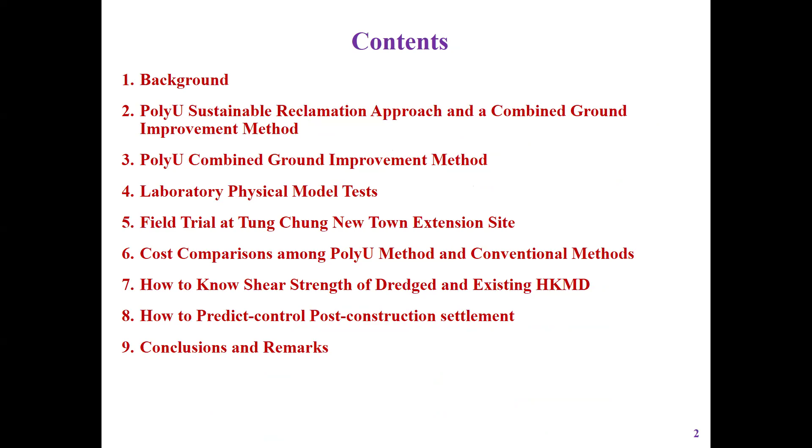Okay, you can see the contents of my talk. I don't want to spend time on this.

You can imagine the short supply of land for construction, and you can see the demand for housing in Hong Kong. To solve the problem, one solution is to create a new piece of land for buildings and infrastructure. You can see here, my mouse is here.

This is Hong Kong airport. Professor Larson mentioned this is a new airport. Actually, the old airport was in the downtown area. This is Hong Kong International Airport, finished in 1997-98, with construction started in 93 or 94.

The government proposed to create land here. The total area is about 1,700 hectares for up to 1.45 million people. This original proposal was scaled down by the government, reclaiming only this area first, as phase one. The total area of reclamation is 1,000 hectares, which is 10 square kilometers, for nearly 500,000 people. The feasibility of this project has been finished.

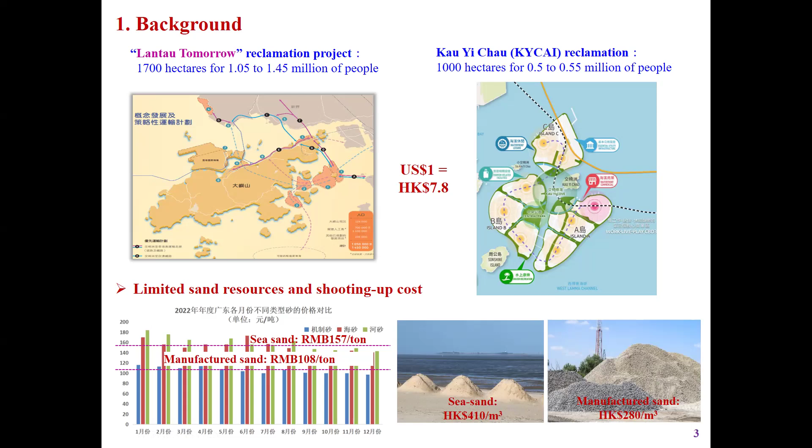So we propose a new approach. This is a very practical approach. Say we call the PolyU, or the Hong Kong Polytechnic University, we simplify as PolyU. In the last 5 years, I got quite big projects.

So we propose a sustainable reclamation approach and also a combined ground improvement method. The first one, you want to know what's the meaning of sustainable reclamation approach. Actually, we don't use sea sand, we don't use manufactured sand.

We use local dredged Hong Kong marine deposit, or Hong Kong marine deposit waste. Because in construction of seawalls or excavation works, people will also dredge some Hong Kong marine deposit, which is also dumped in some areas. We can utilize this kind of Hong Kong marine deposit waste. Or we can also dredge new Hong Kong marine deposit in Hong Kong waters, or waters nearby, or even in channels, navigation channels. And those materials are free.

And we don't have to ship the material from a far distance, so you can save the fuel cost. For example, we can also use various other wastes, like construction waste, other waste which can be utilized, so that we can reduce cement use. We don't use sea sand or manufactured sand. Overall, together, we call this the sustainable approach for reclamation in Hong Kong.

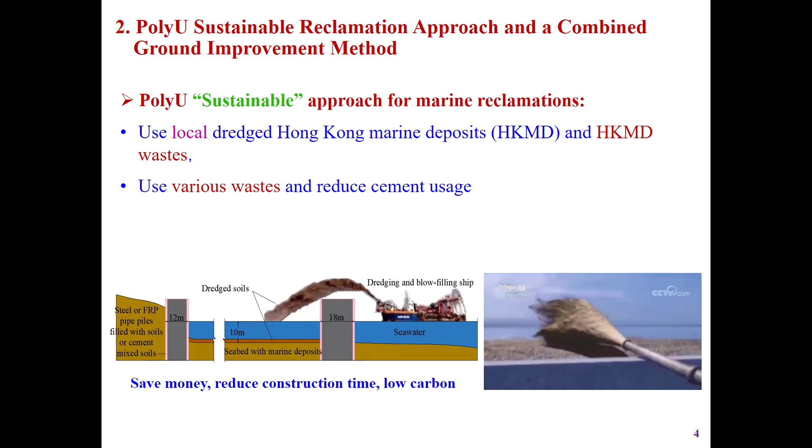And the idea is to construct the seawall first. We need a seawall because the proposed reclamation area is in the sea, so we have to build the seawall to surround the area, and we have existing marine deposit. The seawater depth is about 8 to 10 meters, and we have marine soils in the seabed. The thickness can be a few meters to 20 meters, even more, depending on location. So the soils in the seabed are also soft—it's a mixture of clay, silt, sand, and some shells.

So we build the seawall first. We keep the original marine soils in place. We use a dredging boat to dredge materials, use a hydraulic pump, then pump the marine soils, the marine deposit, as a fluid, then pump it into the area, above the seabed, to fill this area to sea level. Normally in Hong Kong, the land level should be 6 meters above sea level. Then we do this.

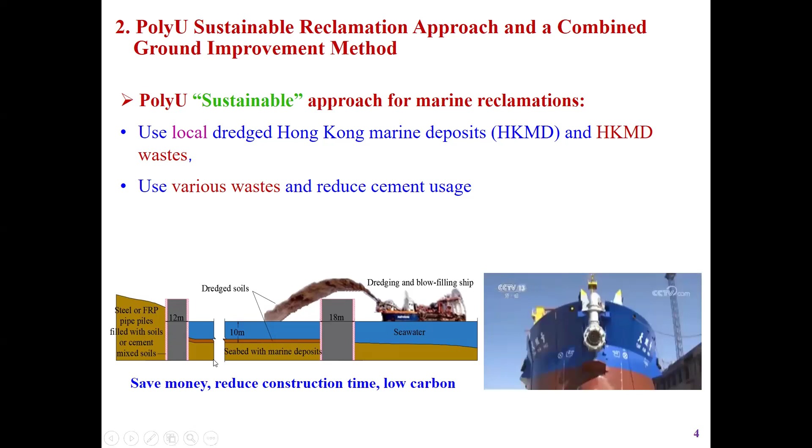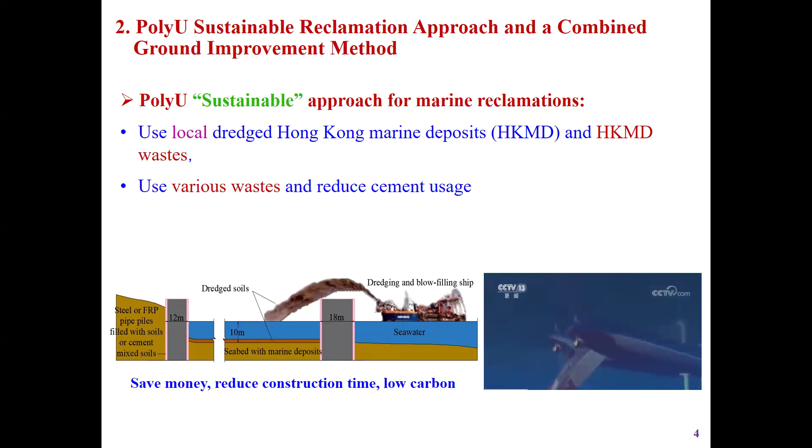The problem is, the soil in the seabed is soft. Then when you pump additional soft soils on top, it becomes even more soft—not good for construction. So we have to improve it. And how to improve it in a time-saving, cost-saving manner is a challenge. So we proposed a combined approach.

This is the second part. A combined ground improvement method is a combination of different techniques put together to improve the soil. So what's the basic idea? For this so-called combined ground improvement method, you can see this is the seawall, and this is the existing soil which also needs improvement. So the idea is we improve the soil here first.

Here, marine soil slurry is placed in by hydraulic pump, like a liquid. To improve this liquid-like soil, we place a horizontal drain first—on the seabed surface, in one layer. Then we pump in additional slurry above the seabed, and put a second layer of horizontal drain on top. This is the first drainage layer we place, then we pump in additional slurry above, and put another layer on top. These are the horizontal drains, in different layers.

Number one is this layering process. Number two is we can connect them together.

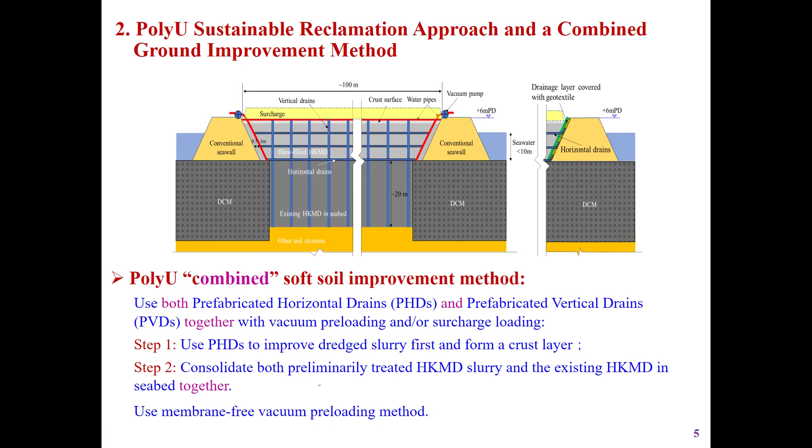We can connect all the horizontal drains to the pump vacuum pipes. Vacuum sucks the water out. Use a pump to suck the water out, and use a pipe to connect horizontal drains. Then use a vacuum pump to suck the water out.

So the slurry will settle down very quickly. Okay, this is the idea - it settles down. Of course, we can pump in and let it settle down. Then you pump in additional fill on the top, maybe up to the seawall level. You can see the soil here, this is sea level outside.

The soil here is above sea level, so the soil above can easily dry, because the slurry at that depth on the surface is above sea level, and because of the sun and heat, evaporation, the soils on the surface can get dry very easily. So we can form a crust layer with high shear strength.

Then we can go to the second stage of ground improvement. When this crust layer is strong enough, the machine can go to the top. Then you can install vertical drains from the top all the way to the bottom.

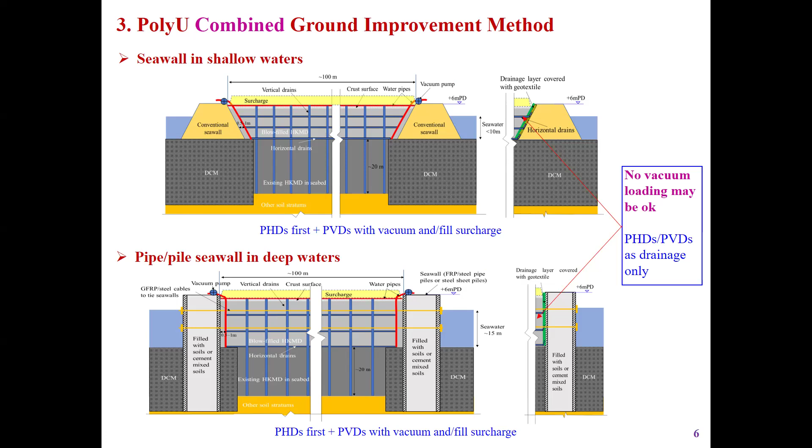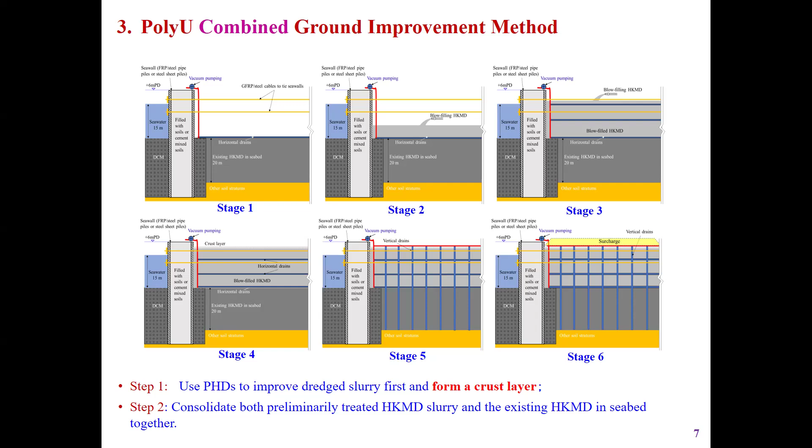Okay, two questions, I remember, okay. So these are the steps: one step is to place horizontal drains, pump in the slurry, and so on - no need to go into details. The important thing here is we use horizontal drains, we apply vacuum, and we don't have to seal the whole area.

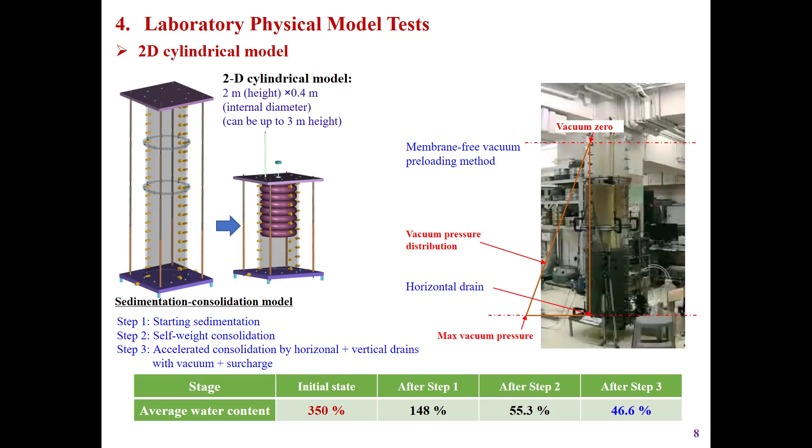So we don't have to seal the top, don't worry about the leakage of vacuum. That's some new ideas. And what does the horizontal drain look like?

We propose horizontal drains in a grid format. The spacing can depend on the design. Of course, this is another model test.

It's a 2-dimensional plane strain model, not 3-dimensional. And horizontal drains are in the grid format. Grid format is good, we don't need horizontal drains like a plate or sheet.

The horizontal drain is even better because later we have to install vertical drains. So in the grid's empty space, we can install vertical drains. This is just for preliminary improvement of slurry.

You can see, so we measure pore pressure, we measure earth pressure, everything. This is after improvement, and then this is settlement. We measure settlement at different levels, and the initial water content is 200%, which is liquid.

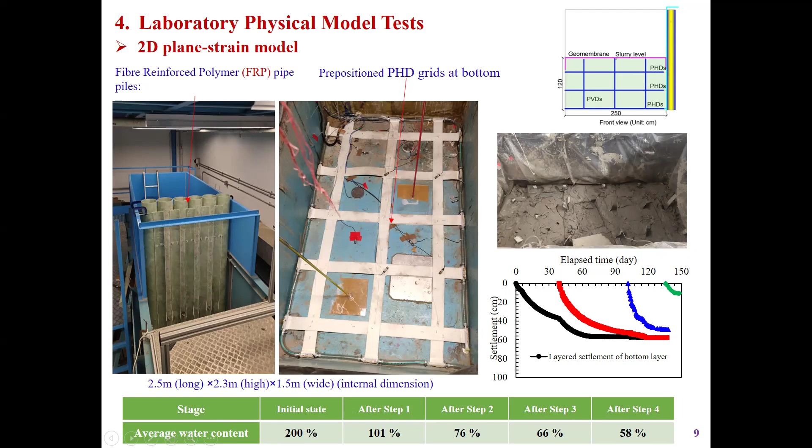After the improvement it's about 58%, like a semi-solid. You can see for the cylinder test, two-dimensional cylinder test, the shear strength initially is 0. It's slurry, so it's 0.

After improvement, the depth and thickness also reduced, sorry about that. The shear strength increases gradually with time to more than 40 kPa, which is quite strong enough. I will show you more later.

We can see a crust on the surface, enough for a machine. We can place a machine on top. This is for the two-dimensional cylinder test.

In the two-dimensional plane strain test, you can also see the initial shear strength is near 0. After improvement, it increases to more than 30 kPa. This is from 2 different types of physical model tests.

To show you this, actually from slurry, horizontal drain, vacuum preloading, we don't need to surcharge. We don't have to seal the top. So this is the idea.

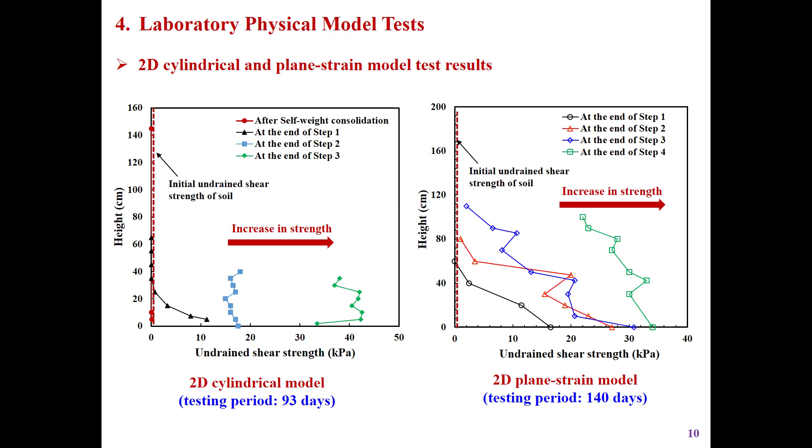Of course we need a prototype test. The physical model test size is small, so we need a large physical field trial in the field. So we got the government support.

This is from government or university. AECOM is an international consulting firm, Build King is a contractor, and with support, much money is from the government, putting in additional money of 5 million Hong Kong dollars.

We choose a site in a new reclamation area. This is a pit, a big test pit. This airport here, this island is what we call - do you know this very famous bridge that links Hong Kong to Zhuhai to Macau, a 55 kilometer long link of tunnels and bridges, for Hong Kong to Macau to Zhuhai.

And this is a customs point. People will come here, go through customs, then go inside Hong Kong. This island is for that. This is a new reclamation for a new town development.

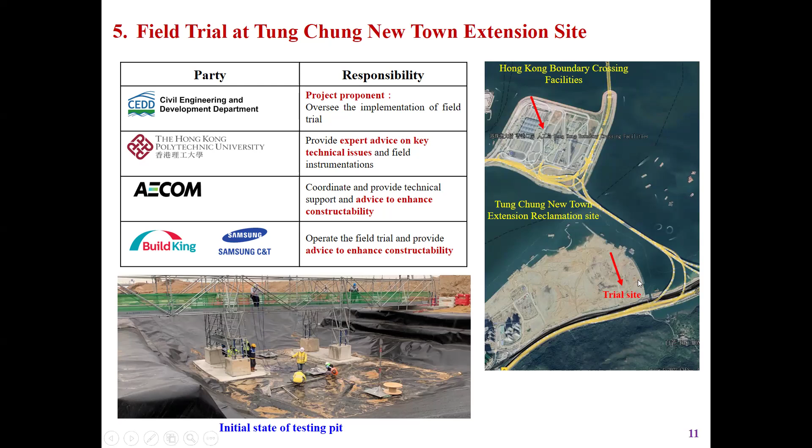The test site is here. The size is quite big - the length is 22.5 meters, the width is 18.5 meters, the depth is 3.5 meters. We put horizontal drains in layers.

We put a settlement plate to measure settlement. We also put pressure transducers and even earth pressure sensors. I don't want to go into details, but all the instrumentation was done by my team.

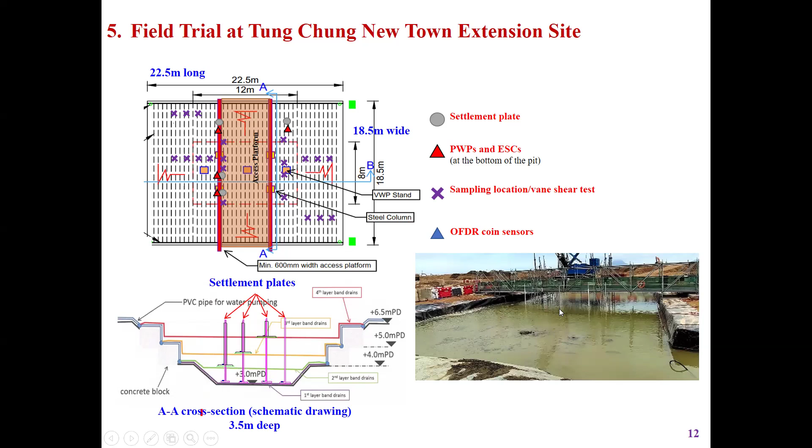You can see on the field, at the top, it's still like liquid. Then through the horizontal drains, we apply vacuum. All the horizontal drains are connected to vacuum pipes. We apply vacuum, and then this slurry becomes a semi-solid ground. You can see it's a semi-solid ground on the surface of the slurry.

On the surface, you can see the shear strength in the crust is quite high. Of course, below the crust, the shear strength is smaller, but in the crust it's about 40 kPa. So it's good enough, strong enough for a machine to move on the surface.

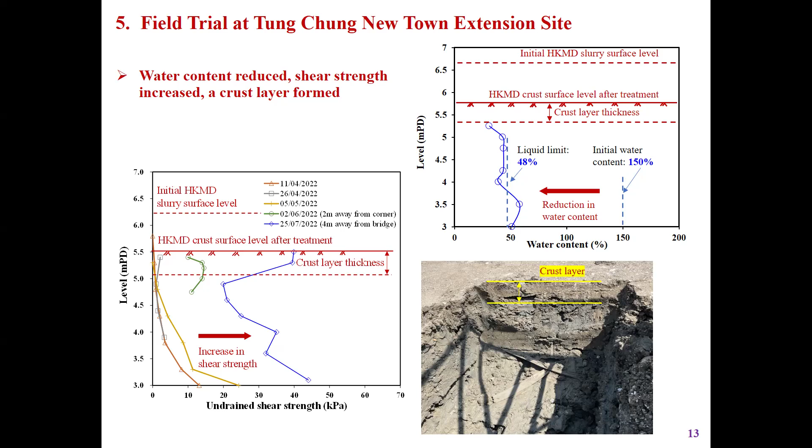You can see at the bottom the shear strength is also high. These are crust layers, because the slurry at this level is above sea level, and due to the sun, drying and evaporation make it easy to get a solid layer. We want to have these crust layers, otherwise how can we install vertical drains? So we observed this, a very good strong crust layer.

You can see from slurry, after an initial 20 or 25 days, finally the soil becomes very strong. This is a small machine. We've done some calculations, and 40 kPa is good for quite a heavy machine to be placed on the surface to install vertical drains.

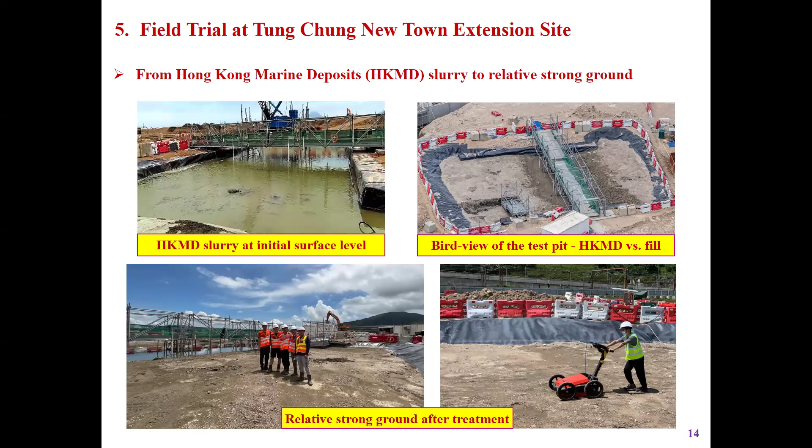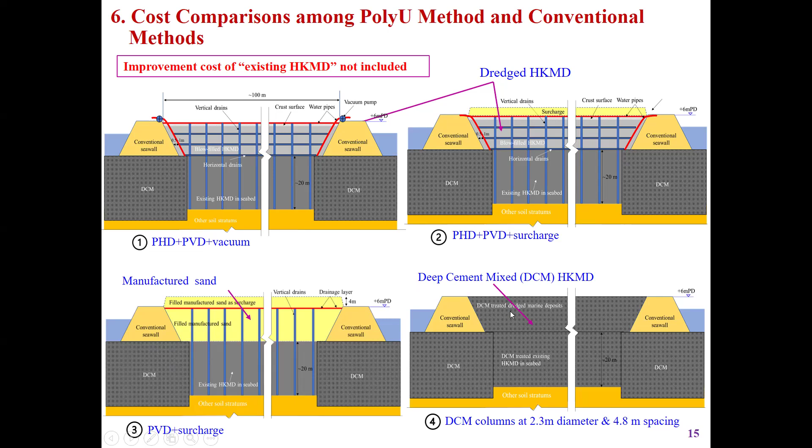Manufactured sand, what's the cost? And some people want to use deep cement mixing to improve everything together, which is even more expensive. We compared this method and deep cement mixing to see the cost comparison. I won't go into details, but I'll show you the unit cost.

If we use dredged Hong Kong marine deposit with horizontal and vertical drains and vacuum preloading, the unit cost is only 36 Hong Kong dollars per cubic meter. 36 divided by 8 is only about four US dollars per cubic meter. If you use manufactured sand, it's 280 Hong Kong dollars per cubic meter, and if you use deep cement mixing, even more expensive, 317 Hong Kong dollars per cubic meter. So you can see the cost difference.

Have you calculated the Japanese technique for the airport? They pump sediment and introduce cement on a barge, in the barge. So it was, what can I say, factory manufactured. So when pumped, all the material was stabilized before it hardens. It's pumped material, but yeah.

I don't think you can decrease it, there cannot be just cost reduction, that's also expensive. Some Japanese people mix slurry with cement first on the barge, then pump it into the seabed. That also needs enough cement. Once you mix, you need manpower and a machine to mix, and adding cement costs money, increasing the material cost. I don't think that's cheaper, maybe very close to deep cement mixing, maybe a little bit cheaper, but not cheaper than simply using dredged Hong Kong marine deposit with vacuum preloading and horizontal water drains. I don't think it's cheaper, it should be more expensive. So you can see if we use our approach, it's very cheap.

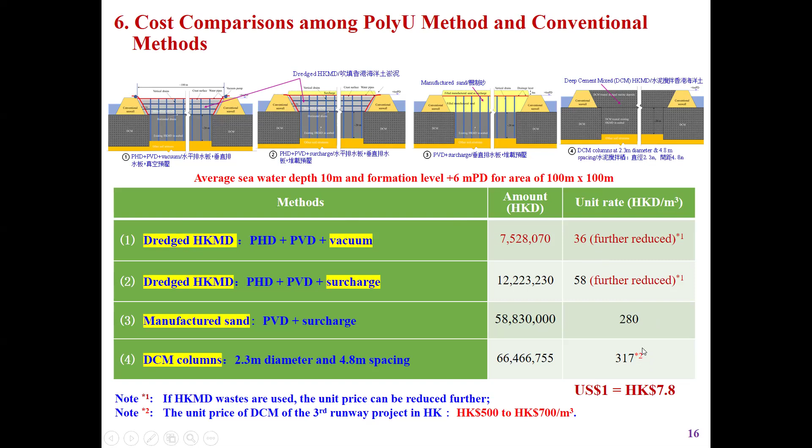A fraction of the cost of 280 or 317, the cost can be reduced a lot. This is the cost comparison, I won't go into details. Then for the whole area, we calculated how much we can save in unit cost across certain areas, it's easy to understand. We can save billions of dollars, I won't go into details.

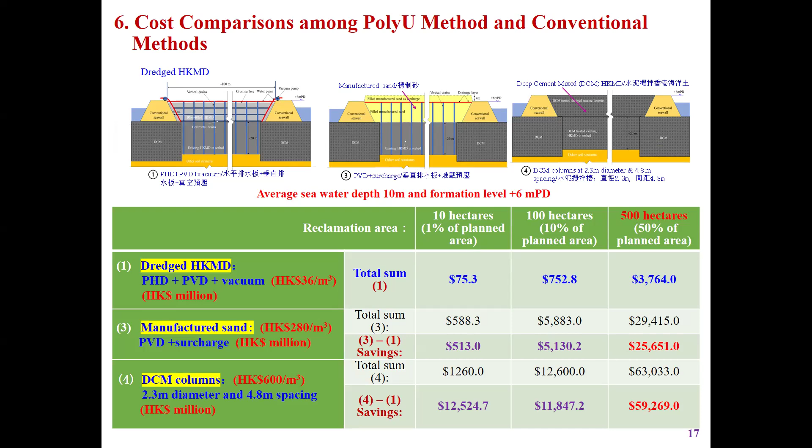No worry, let's go back to your question. I mean, regarding horizontal drains, how can we place horizontal drains for a large area?

Maybe 100 meters wide, maybe 100 meters long. People cannot go there, it's slurry, like liquid. Okay, how to do this one?

You can make this in a roll at a smaller size. You can transport a roll of horizontal drains from the manufacturing plant to the site. So easy to transport. Okay, that's number one.

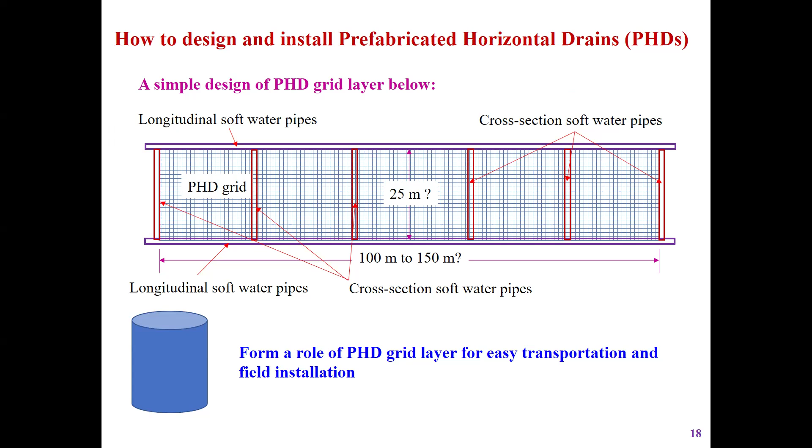In a roller, like a roller. Second, we can place this one. I have a small animation here, you can see - see, this is the width.

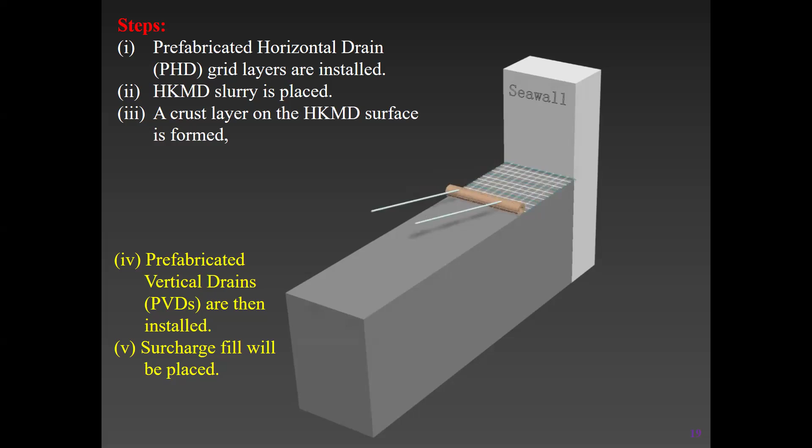The roller, you can use ropes, something to put on one surface. No need to send people inside. The ropes, you can pull from the shore. One layer by one layer by one layer construction. Very easy to place horizontal drains.

So this is a new concept from us. The first time we propose this one.

Some Chinese people in mainland China also use dredged marine soils or subsoils as fill material to fill a reclamation area. China has had this idea already, they have done such projects successfully, but they use a different method to improve the slurry.

They use water drains - for this layer, for this layer of slurry, they use water drains. But the slurry is a slurry, so how can we place horizontal water drains? They use a boat to go inside, and they use manpower to insert them.

You can imagine the slurry can settle down by self-weight consolidation. Maybe on the surface it's very soft, maybe near the bottom it's also strong.

Hey, go ahead please. Yeah, I was thinking about this, it's probably something you will talk about maybe. Okay yeah, go ahead.

First, it will be normally consolidated. The soil in the seabed, the original Hong Kong marine soils, ranges from normal consolidation to over-consolidation of 1.2 or 1.3 - not heavy, not heavy for the Hong Kong existing one. We very often talk about 1.3 in Sweden, to get rid of the enormous creep.

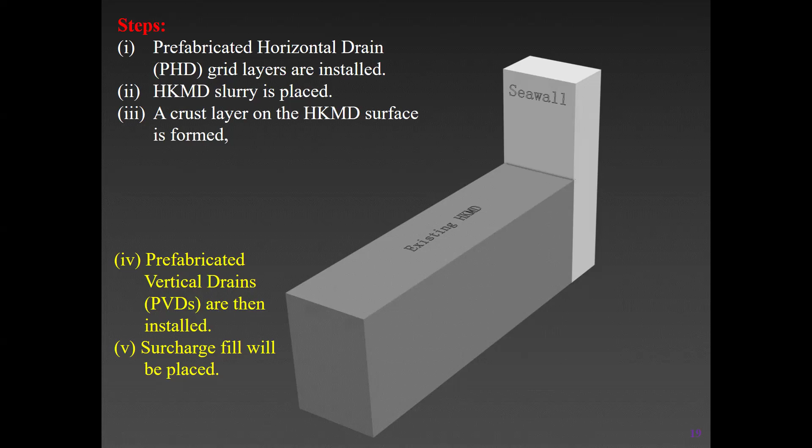Regarding the improvement of soils, especially soft soils, you have to have certain knowledge of the basic properties of the soils.

For example, the soft soil in Sweden will be different from the soft soils or marine soils in Hong Kong. Here I show you some comparison: Hong Kong marine deposit, Tianjin marine soils in the north and east of Beijing, and Dalian further north, close to Korea and Japan. You can see the properties of Hong Kong marine deposits are, in general speaking, much better than the soft soil in Tianjin and Dalian.

Why? Because of the minerals, which are very important. Hong Kong marine deposits only have minerals like kaolinite and illite. But the soft soil in Tianjin and Dalian has a mix of illite and montmorillonite. This is troublesome clay. For nuclear waste disposal, they want to use montmorillonite or bentonite because the permeability is very, very low, so when permeability is very low, the water has difficulty coming out. So there's some difficulty there. Fortunately, Hong Kong marine deposits' properties are better in general.

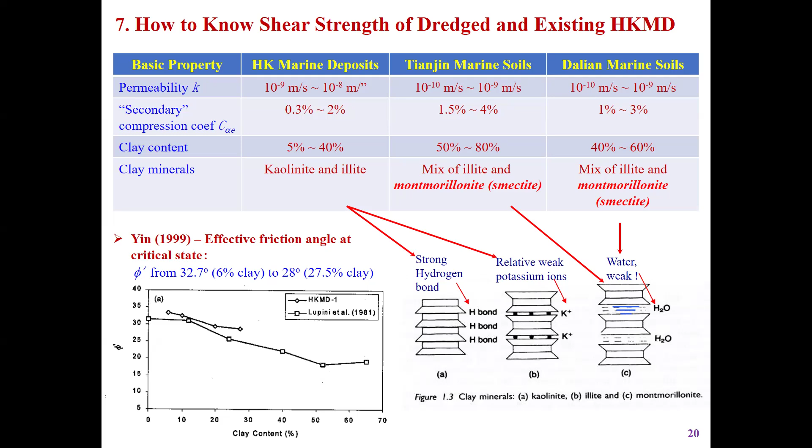So I did some study on Hong Kong marine deposits over a long history, and published a paper regarding Hong Kong marine deposits with different clay content. More clay means less effective friction angle. We did some correlations before — I won't go into details — but the content of clay affects the effective friction angle: more clay is more trouble, and the stiffness is also smaller.

Another study we did was on cement-mixed Hong Kong marine deposit. I started laboratory studies in 1998, mixing Portland cement powder with the marine deposit at different percentages. Later, another student did a PhD study in this area. We found really good correlations between water-cement ratio and unconfined shear strength for Hong Kong marine deposit. Maybe for other soils it's different, but the trend correlation formula may still be used.

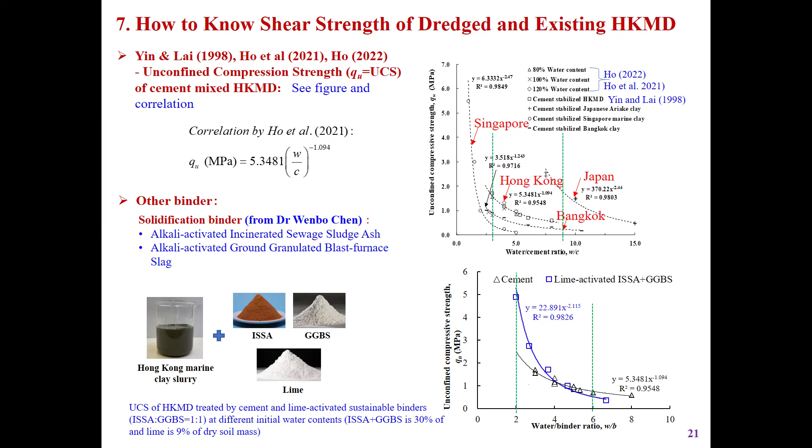400% difference, depending on the surrounding horizontal pressure - so it's a huge influence actually. We're doing field tests now, starting in January. So I hope you can write a paper, then people will know. Absolutely, we have a paper now with the professor - we intend to send it to the Canadian Geotechnical Journal in about a month or so.

The next subsection is how to predict and control post-construction settlement. This is a very important topic - once you improve the soils, you have to make sure settlement, especially post-construction settlement, is not too big, is within range. Otherwise, in the future when you put buildings, pipelines, or utilities on the soft soil ground above, you'll have trouble - cracks, differential settlement, and so on.

So going back to my previous research, how do you control it? You have to predict first - at least do some initial calculation. Then you need methods. Basically we have two methods: numerical methods and simple methods. For numerical methods, you probably know the very popular program Plaxis.

In Plaxis, for soft soils you have to consider nonlinear behavior - elastic, viscoplastic - especially you want to consider creep. So you have to apply a soft soil creep model in the Plaxis program, and this soft soil creep model is actually an elastic viscoplastic model.

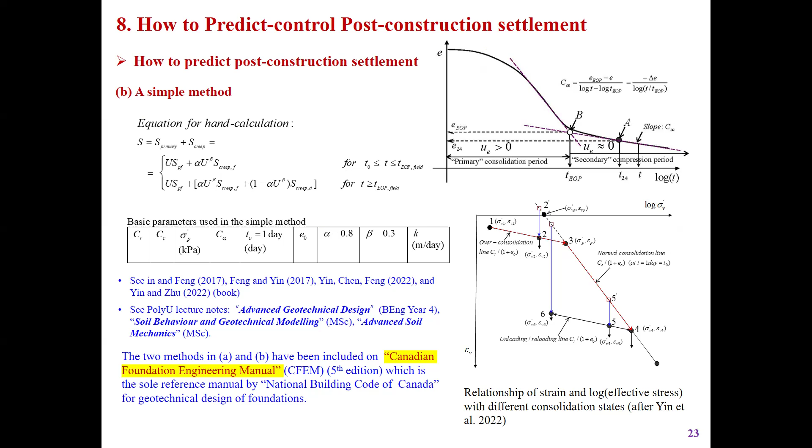This is the first manual which accepted my 2 methods. Actually, for the first method, it's already there. You know, sorry, this one - let's go back.

Sorry, numerical methods - you already use this in Europe, very popular in Europe. This method is also in the Canadian Foundation Engineering Manual. You have to choose a proper model; this model is already used in practice. So this method has been used, but not in the Eurocode, though it has been presented very clearly in the Canadian Foundation Engineering Manual. You have to use the method with a properly considered model. In Eurocode it's not mentioned, but this method has been used in Norway, the UK, and Germany already, just not included in the Eurocode.

I hope in the future this can be included in the Eurocode. So you don't state it exactly - no, probably it could be used.

The requirements are a little bit on a higher level, but there could also be national guidelines on how to fulfill the Eurocode requirements, and in such guidelines more details could be put in. Yeah, you're right, that's what you mentioned today - you want to present the guidelines for the local area, like your countries. I think in the future, if you have a chance, you can think about this.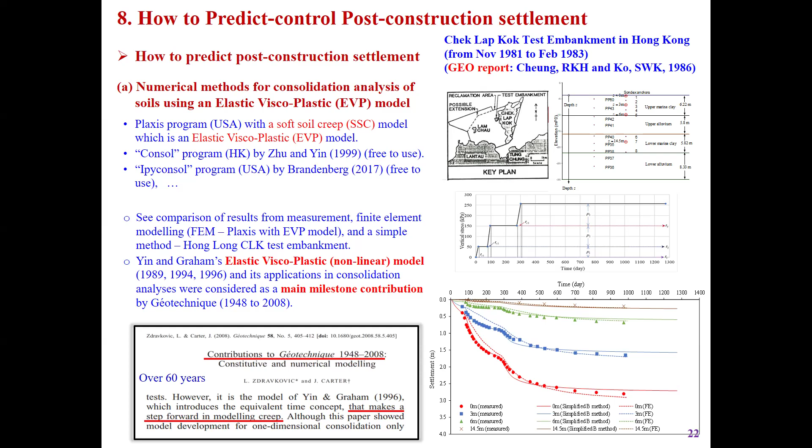The final point is how to control this - I'll answer Professor Stephen's question on how to make soft soils over-consolidated, maybe 1.3 or more. You mentioned 1.3, the same number I hear here. So for controlling post-construction settlement, prediction and calculation method is one thing, and how to control it - making post-construction settlement as small as possible - is another.

One simple and easy way is to make the soft soil over-consolidated. For younger people who may not know this: just surcharge more, then remove the fill, and the post-construction settlement becomes small. So the idea is here.

If this is the initial stress, you have a design load here - for example, the design load depends on the structure, maybe traffic loads and so on. You have a certain design load for a Hong Kong runway, about 40-50 kPa. So from initial stress, you apply the design load and note the strain - the stress moves from here to here, from originally over-consolidated, past the pre-consolidation pressure, to here.

This point is on the normal consolidation line, so you can see the compression under the design load from here to here is big - that's elastic-plastic compression. Then you have creep. When the point is on the normal consolidation line, the creep is very big; at the over-consolidation point, the creep is small.

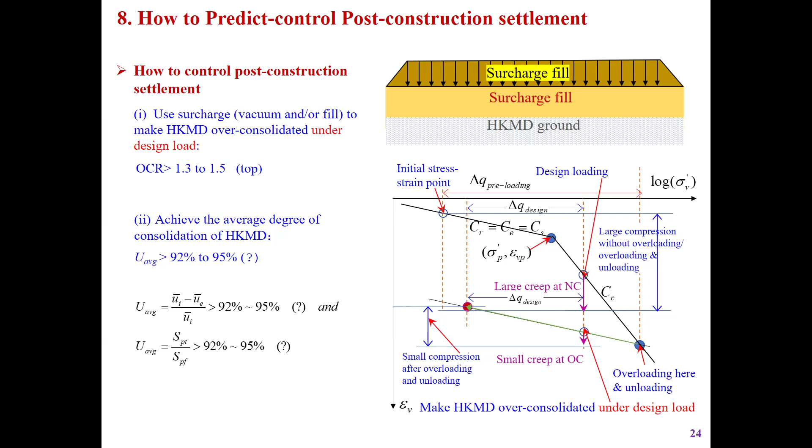So how do you control settlement? Make sure it's over-consolidated. It's really simple. I've done some calculation, one example, I won't go into details - in order to achieve OCR 1.5, for example, I did a simple calculation here.

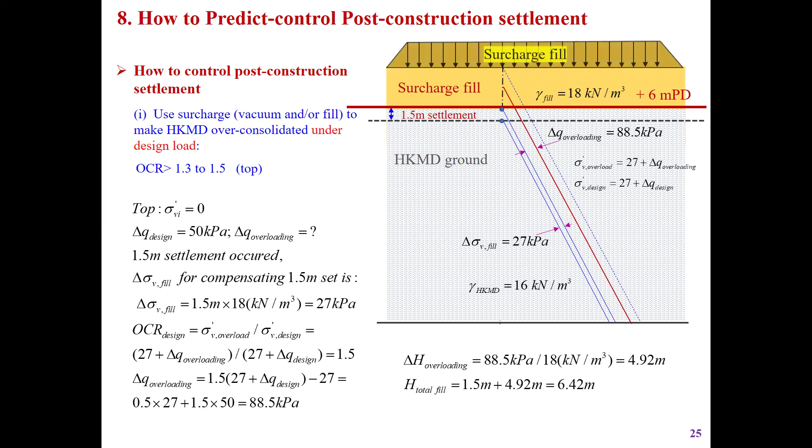Another very important issue is how to check the quality of soil improvement. I mentioned different technologies - horizontal drains, vacuum preloading, vertical drains, surcharge, and so on. How do you make sure the improvement reaches your requirements?

One simple way is to do the vane shear test, which is very good for soft soils compared to cone penetration. So do the vane shear test to check the undrained shear strength. If the soft soil is improved to a certain value, then Cu should be high enough. As a consultant or client, you can specify the required Cu of the ground improvement.

Sorry, I have to go to a meeting. But then I'll take you to lunch. Thank you very much. I'll join you after lunch for the Vasa Museum. Thank you very much.

So you can check the quality of soil improvement - as a consultant or client, you make sure the contractor does the right job. Cu is not the coefficient of uniformity - Cu is the undrained shear strength from the shear test. The symbol is the same, but it has a different meaning: undrained shear strength.

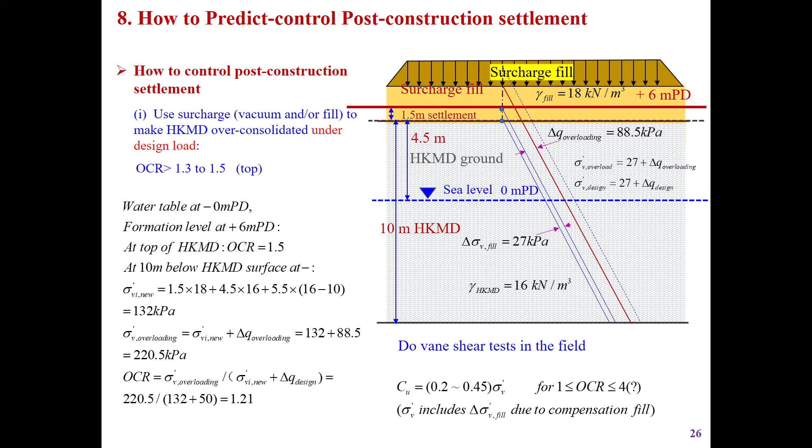So, conclusions and remarks. Number one: laboratory physical model tests and field trials in Hong Kong have demonstrated that the PolyU's Method for dredged Hong Kong marine deposit slurry improvement method is effective - both in the laboratory and in the field trial, it's very effective and can achieve the desired requirements.

PolyU's sustainable reclamation approach can save a lot of money, reduce construction time, and produce low carbon. We just use local materials, so we don't need manufactured sand. And since Hong Kong marine deposit doesn't have any montmorillonite, Hong Kong marine deposit is better than those sediments in Tianjin or Dalian - it's easier to consolidate and achieve high shear strengths.

Cement and other binders mixed with Hong Kong marine deposit can be used at key locations, not everywhere - if we use this mixing method everywhere, the cost is very high. But at some key locations which require high shear strength, you can do so, no problem - just not everywhere.

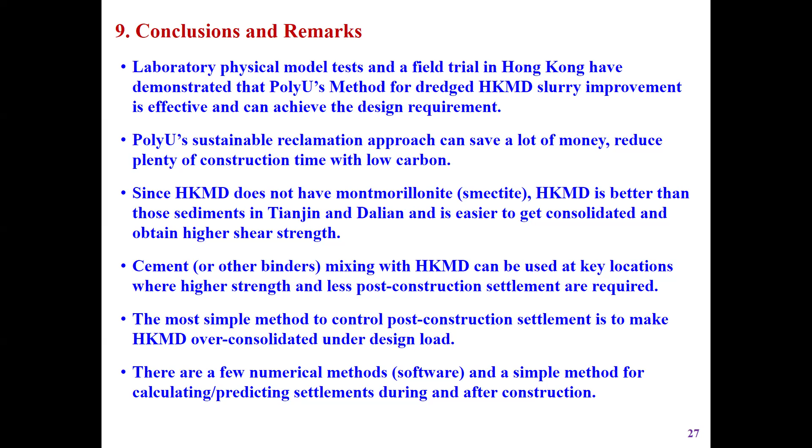Simple methods can be used to calculate the settlement, and we can control the post-construction settlement. The simple way to do so is to make the marine deposit over-consolidated. There are a few numerical methods and simple methods, including Plaxis, that can be used for calculating or predicting settlement during and after construction - Plaxis, you know very well, you can use that. Finally, I want to draw people's attention because I made a presentation of this in Hong Kong for the client, for local consultants and people.

So I want to emphasize again the main conclusion: quality control. Hong Kong marine deposit is a good fill material for Hong Kong, because Hong Kong has never used Hong Kong marine deposit as a fill material so far. I want to promote this and convince them this is a good fill material, so I need some time to convince them. I emphasize this again: it's actually a good fill material, not bad.

So how do we know? We control the post-construction settlement. We can make the Hong Kong marine deposit over-consolidated, under the design load, because under the design load the soil is over-consolidated. Second, you can achieve OCR 1.3 or even more. 1.3 is probably a good number. More, you need more money, more time.

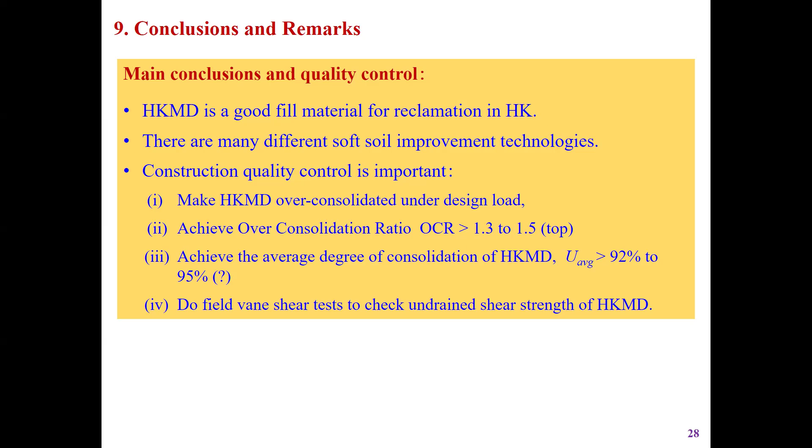Finally, you can check the quality. No matter what the contractors claim, that they have done a good job according to the specification, I can check it. You can do a vane shear test to check the undrained shear strength, to see if it meets your requirements or not. So that's a fact, and the contractors cannot lie. As a consultant, as a client, you can check it.

One connection between the ASCE and the Greater China section, just the last one.

What is the connection between ASCE and the Greater China section? Actually, ASCE has a Greater China section. ASCE is the American Society of Civil Engineers, headquartered in the USA, but there is a Greater China section in Hong Kong, which is the local chapter, including people in Hong Kong, mainland China, and Macau. They are very active, organizing seminars and conferences in Hong Kong. The Hong Kong Geotechnical Society is more related to the international one, the member society of the International Society for Soil Mechanics and Geotechnical Engineering, more international. You are in the technical committee of that one, which is more USA/international, while this one is local.